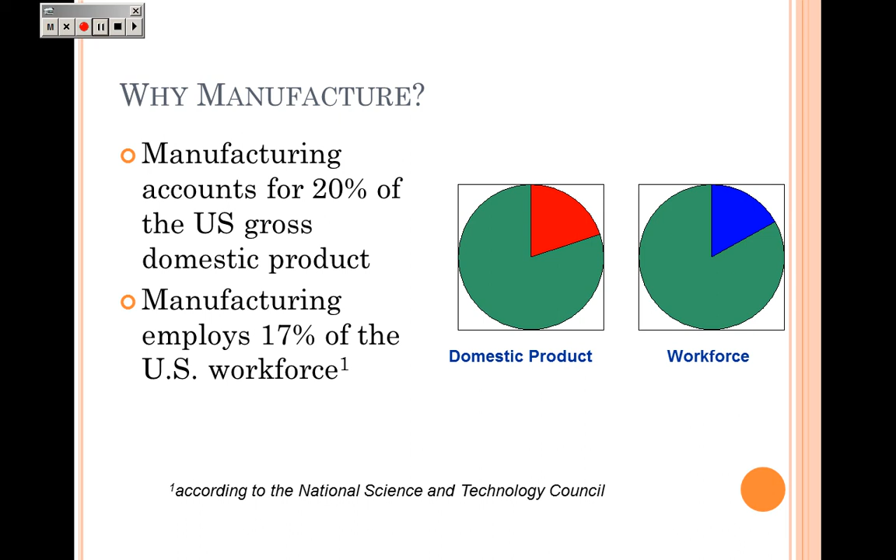Prior to manufacturing, and prior to the 19th century, everything was essentially a handmade good. Things were made by artisans, and all products were handmade. Today we still have artisans and craftspeople like this, but it's more of a hobby or something people do as a specialty or craft to make money. They make beautiful, handmade, high-quality merchandise.

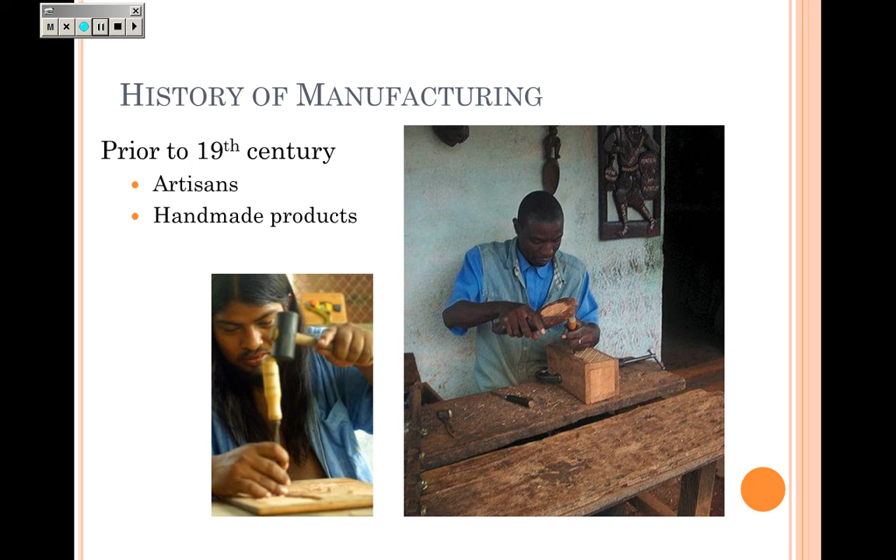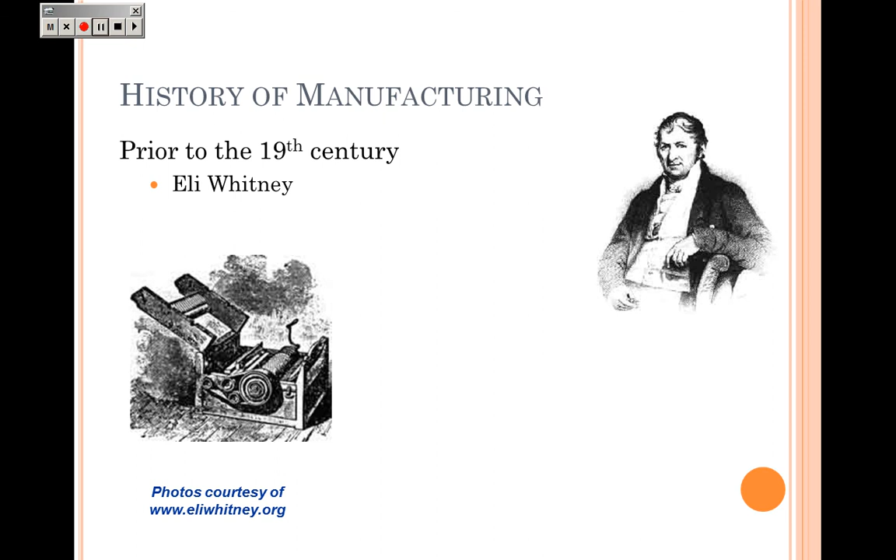Prior to the 19th century, there was a guy named Eli Whitney. You guys probably all know he invented the cotton gin. He didn't have great business skills and went bankrupt because of that, so he left the South, traveled north, and started over. He took a job mass producing muskets, which led to the invention of the first milling machine. He realized he needed to break the production process down into smaller parts that did not require great amounts of skill, so he came up with the first idea of interchangeable parts.

He also had this revolutionary idea, hard as it is to believe it was revolutionary, that workers in the factory should be treated with respect. That idea initially did not catch on in U.S. factories. So while we credit him with the invention of the cotton gin, important in the history of the war between the states, his biggest contribution to manufacturing is the idea of interchangeable parts, along with the work that led to the modern milling machine.

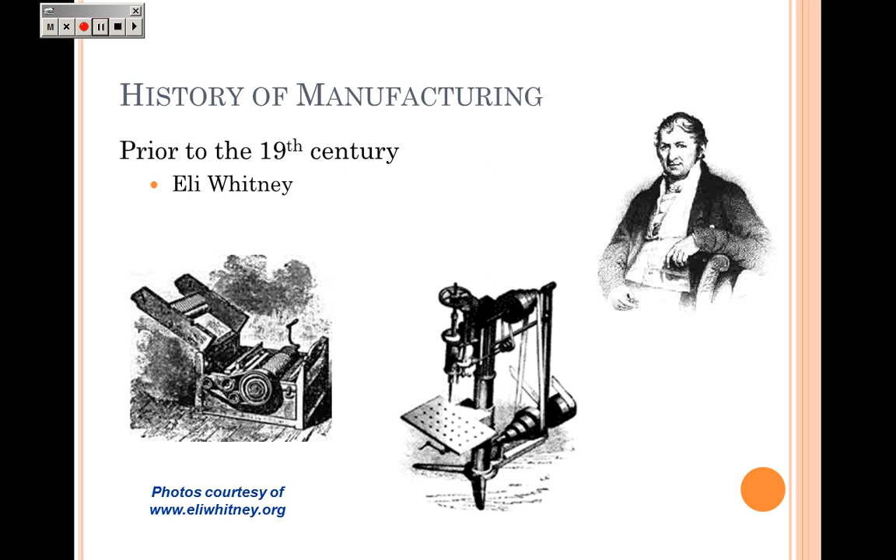Then we have Henry Ford in the early 1900s. He revolutionized manufacturing using the assembly line. He wanted to speed up the manufacturing process by breaking it down into smaller parts so that unskilled laborers could be used — they didn't have to know very much at all. He had a lot of problems with his labor force initially because everything was repetitive and menial, which wasn't the kind of work people were accustomed to, and it caused a low morale problem.

The work was dangerous too. Remember, factories didn't have the safety conditions they do today. Records show they had about 200 severed fingers in the year 1911 alone. So Ford began to improve morale — he doubled the pay in 1914 from $2.25 a day to $5 a day.

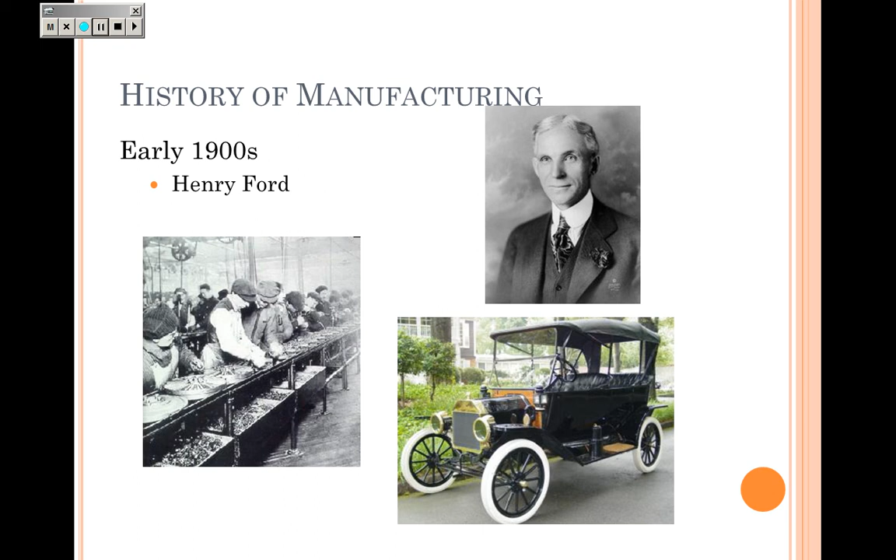Ford Motor Company was also later responsible for the first death by a robot, in the late 1970s, when a worker was hit in the head by a robotic arm.

So changing speeds. In the early 1900s, Kiichiro Toyoda, who we credit with lean manufacturing - Toyota, like the car, because that became Toyota Manufacturing, Toyota Motor Company - they developed what's called just-in-time manufacturing. Just-in-time means the parts get to the assembly line just as they're needed.

For instance, if we're talking about the BMWs made in Spartanburg, the dashes get there from Plastic Omnium just as they are needed. Or maybe those come from the place in Fountain Inn, but the parts get to the line just as needed. Sometimes things are cut so close they even have to put a holding part, a temporary part, in place of things. But when you don't have money tied up in inventory in warehouses, that saves money.

It also saves space. Toyota also introduced the idea of Kaizen, which literally means good change, and it means continuous improvement with employee input. So the Japanese distinguish between Kaizen, which is continuous slow change, from innovation. Innovation is radical change.

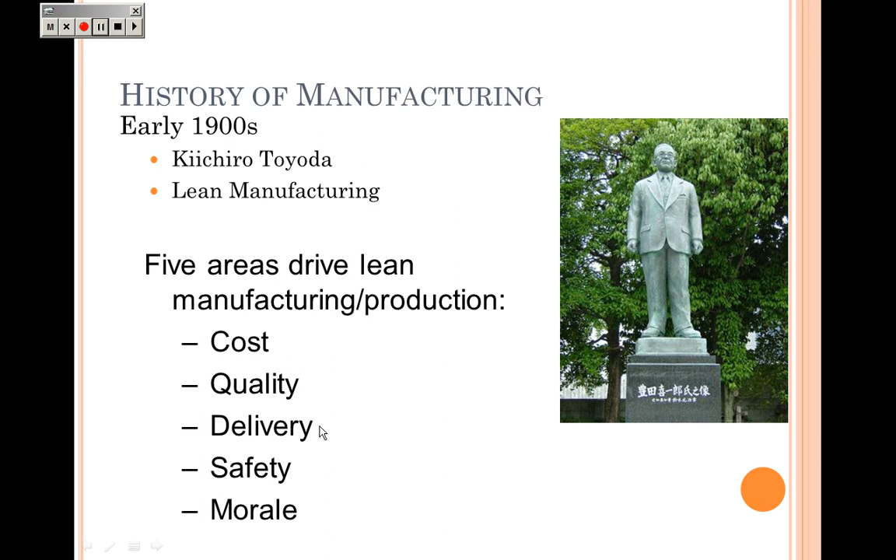So lean manufacturing also became known as the Toyota production system. There's an entire book on that which you can get. The Toyota production system is the systematic elimination of waste, and that phrase was coined in the early 1990s. People still use lean manufacturing today. But the systematic elimination of waste centers around 5 areas: cost, quality, delivery, safety, and morale.

So, a history of manufacturing. In the mid-1900s, the Webb Company created the first electronically coordinated conveyor system. You can see some conveyor systems here, different kinds - overhead, underneath, very typical to what you would expect to see. These folks introduced conveyor systems to Henry Ford, and they continue to make conveyor systems today.

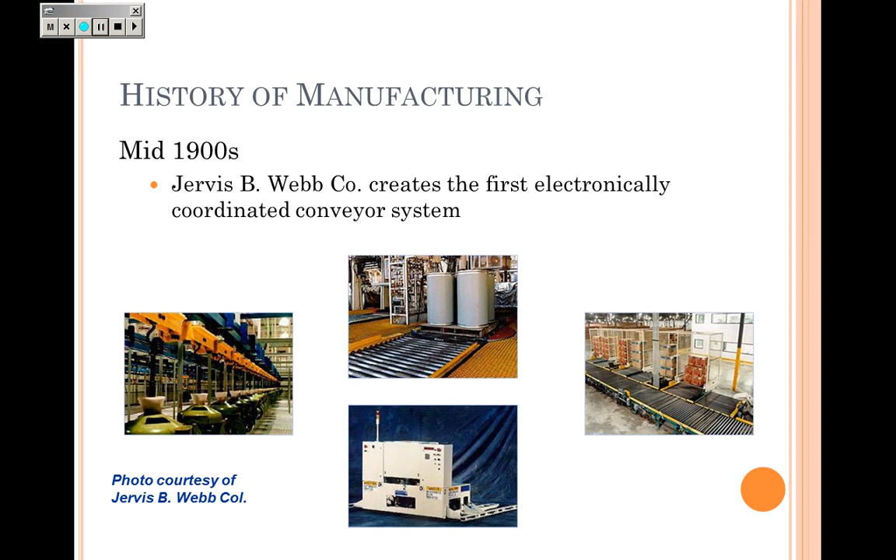So manufacturing today centers around some other automated pieces. The automated storage and retrieval system moves material horizontally and vertically between storage compartments and transfer stations. It can bring it to the process line, or bring it out to a control panel where an operator dials it in, and it goes and retrieves the part and brings it out automatically.

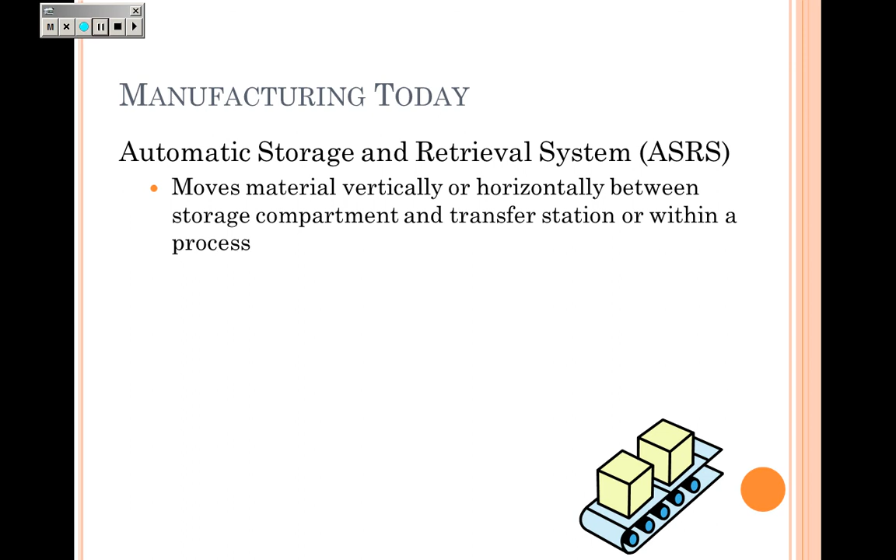The very first place I worked in manufacturing actually had 2 self-guided vehicles. Ours were used to deliver mail and hot jobs around the plant, and we called them Tweedledee and Tweedledum. However, Tweedledum was dumber and sometimes had more accidents, so we had to be careful with him.

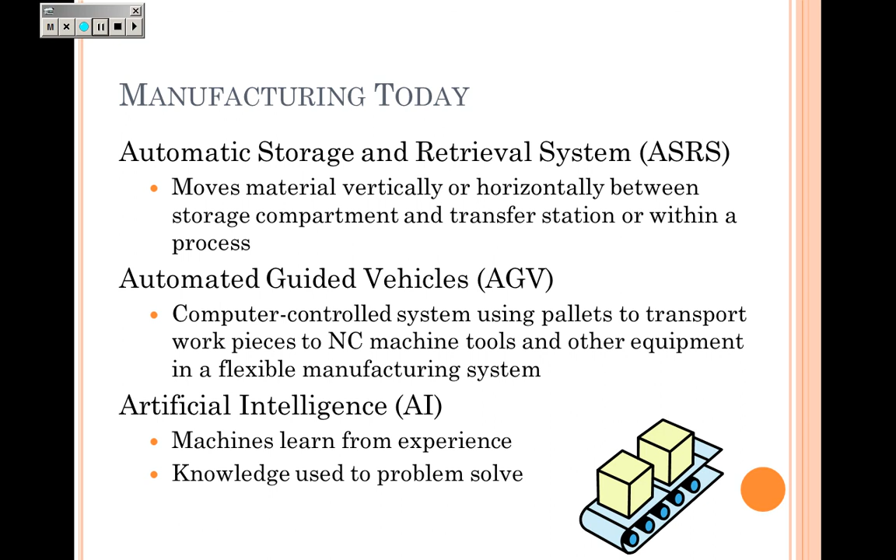Okay, then the other one is artificial intelligence. That's where machines learn from experience, from what they've done previously. You might think about this like if you've ever made a change in Word or PowerPoint, changed how a bullet was formatted, and the next time it automatically adapted. That's kind of a type of artificial intelligence - it learned from the experience, that software did. So in this case, the software reads what you're doing, learns from experience, and changes what the hardware is doing there.

Continuing on, Computer Integrated Manufacturing is what CIM stands for. It is a factory or company-wide philosophy for planning, integration, and implementation of automation. It does not eliminate workers, but it does change the job workers have, and it also changes the skill level to be higher, so it actually increases the pay.

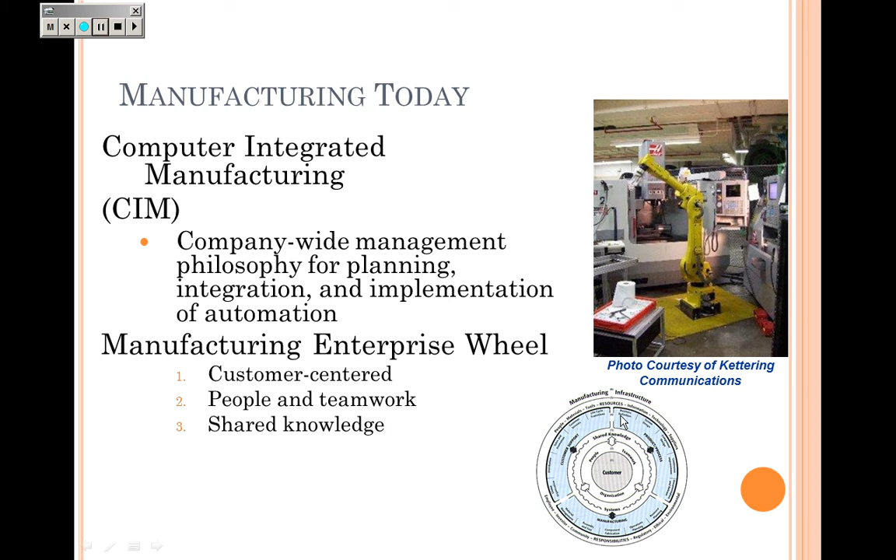Then if we look at this manufacturing enterprise wheel, this shows that the customer is the center of all manufacturing activities - that's why we engage in the activities. People and teamwork are an important part of it. It's about shared knowledge, as you can see in this inner circle. And then the key processes are an important part, along with what the resources and responsibilities are, and the infrastructure.

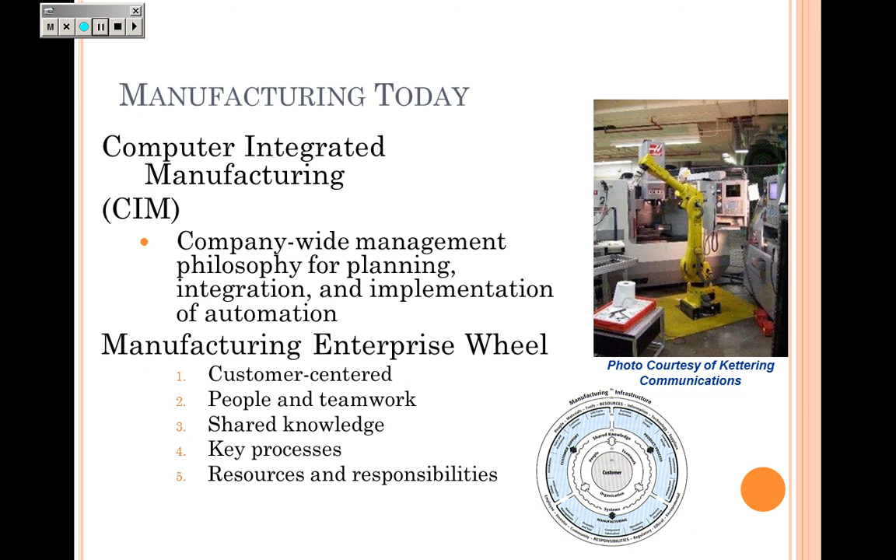Let's talk about Kaizen a little bit. That is the Japanese word for improvement, and it's based on continuous improvement by everyone.

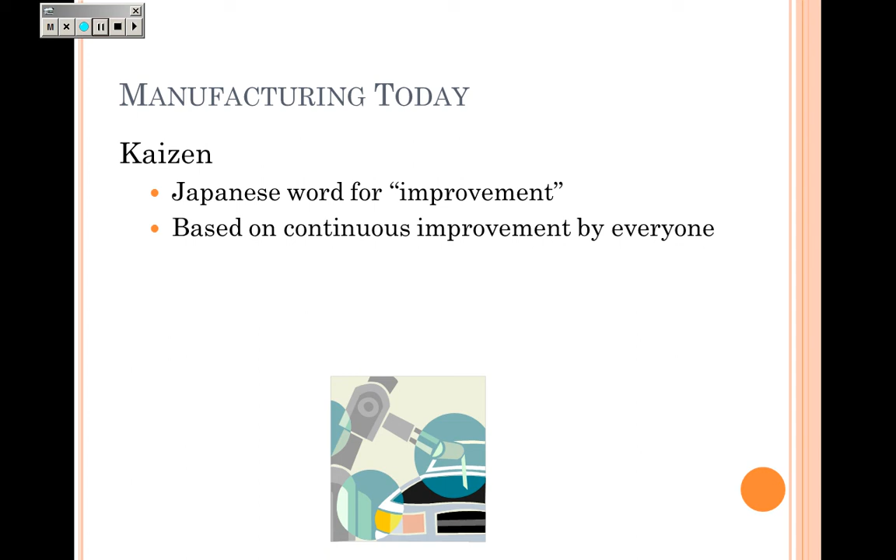We also have something called a flexible manufacturing system. This is a work center that can be adjusted. Conveyors could be moved, the robot could be moved, the end effector could be changed on the robot to make it do different things. You can adapt the system to a changing need, and it's efficient. It can increase productivity by as much as 50%.

Here I'm showing kind of a robotic arm in this clip art. It's spot welding or placing something on an automobile line. But that robot will do that job repetitively and not complain and not get bored.

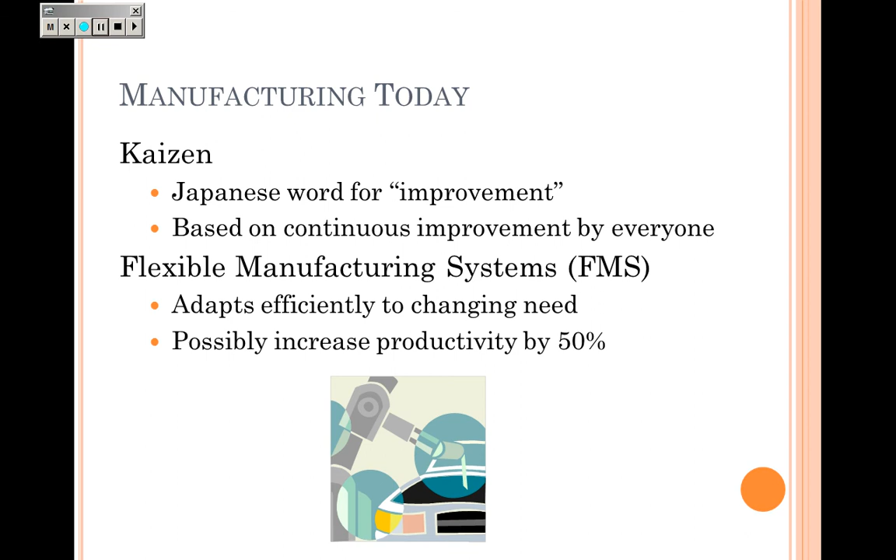Just in time, see the clock? JIT, the objective here is to eliminate waste. You can produce mixed products; it doesn't mean you necessarily only make the one thing just in time. In just-in-time facilities, workers are going to be cross-trained, but they are going to be more valuable because of that.

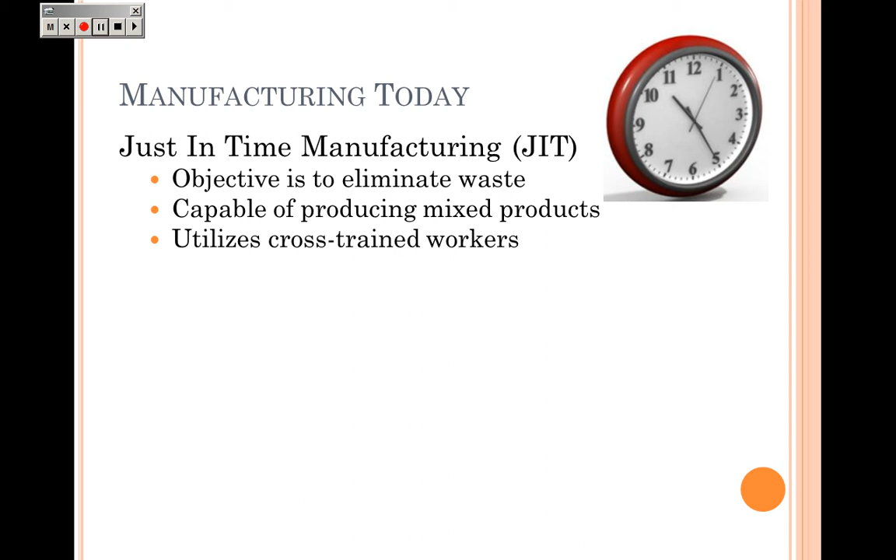The Toyota Production System, TPS, that's what we call lean manufacturing. That began in the 1980s, and then in the 90s we began to call it lean. In this system, everything is highly coordinated. You want all the activities involved in production to happen at a specified time. You want to minimize storage, so you don't want there to be a cost of goods in storage. The combination of just-in-time and the Toyota Production System, lean manufacturing, started earlier, but they are still very popular today, over 20 years later.

The Toyota Production System has been widely used in automotive. It competes with mass production. It employs a lean production strategy. There are not going to be a lot of people standing around doing nothing at work.

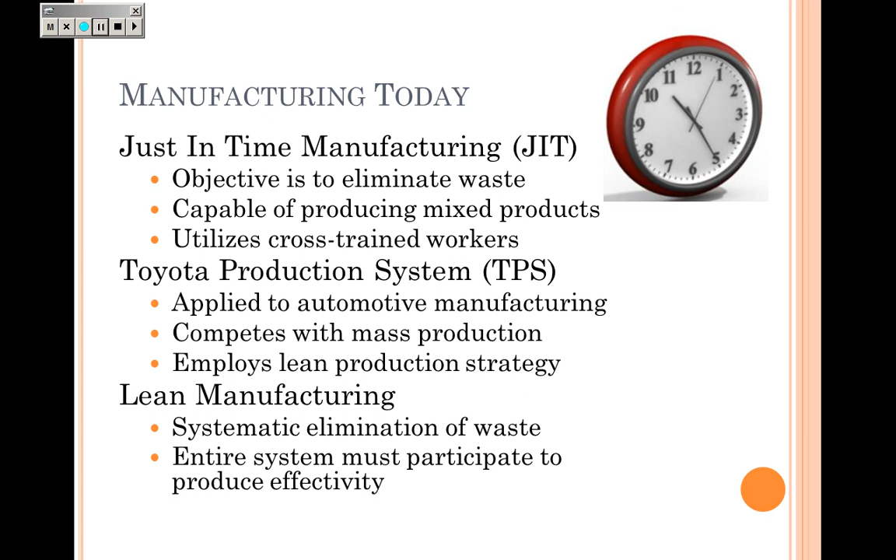Lean manufacturing is the systematic elimination of waste. For that to work, the entire system, all the people, from the lowest operator to the plant manager, have to participate. This is the lean manufacturing video, and I'll ask you to go offline and watch that.

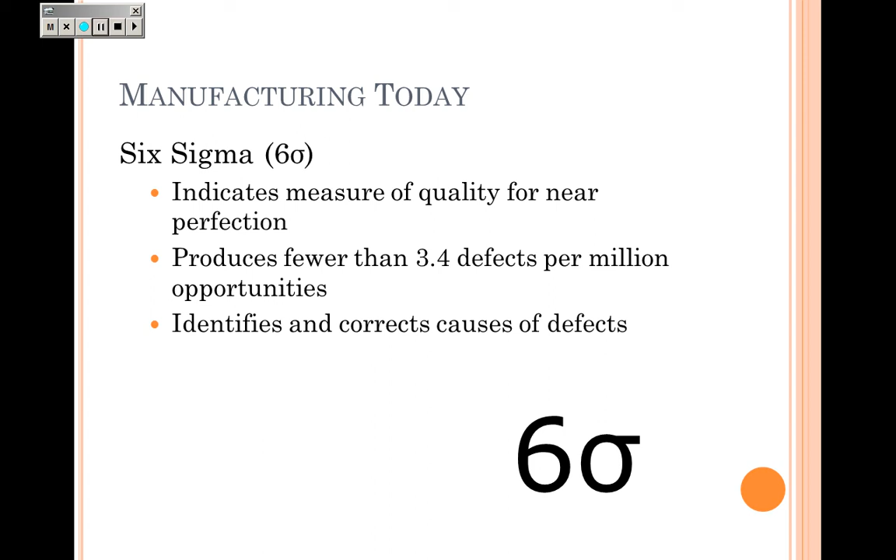Six Sigma, that is a quality measure that is statistically based, and it means you are aiming for near perfection. It produces fewer than 3.4 defects per million, and it uses statistical tools to minimize defects and maximize production. The Six Sigma process also identifies and corrects the causes of defects. It utilizes the 5 whys to uncover the root cause.

This is a flexible manufacturing cell. This is a flexible conveyor system. These are storage racks. There are some milling machines there, and robots.

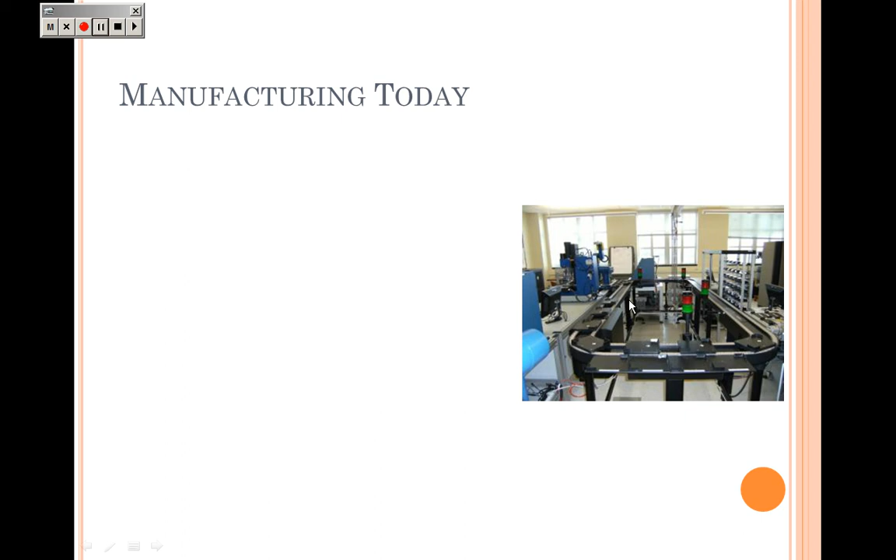Rapid prototyping, that's a prototype made directly from a computer model. You don't have to take it to the machine shop, you don't have to get a machinist to make an initial prototype for you. There are a lot of different technologies, some are additive, some are subtractive. The most popular are additive three-dimensional printers.

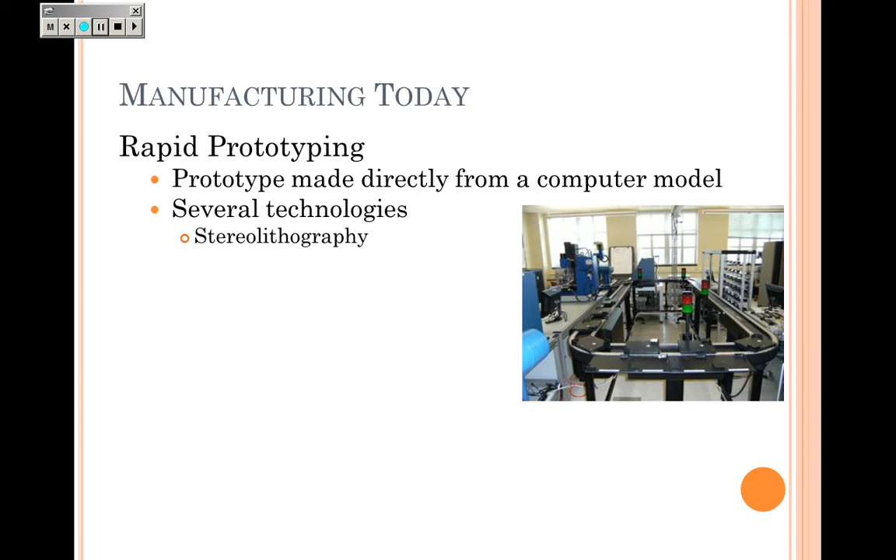There's stereolithography, there's 3D printing, there's selective laser sintering, there's fused deposition modeling. So all these are methods. The most popular these days is really the three-dimensional printing. We have one of those in the back of the lab, you'll be able to see that.

Work cell. Like I said, this is a work cell. It's the manufacturing resources arranged in a group. You've got milling machines, you've got a lathe there maybe. There's a robot somewhere putting pieces on and off the conveyor system. There's a storage area. And this can be reconfigured if you need to do something different.

Work envelope, that is the range of motion of a robot or a machine. If you place the robot over here in the corner of this room, its work envelope is not going to allow you to reach the conveyor.

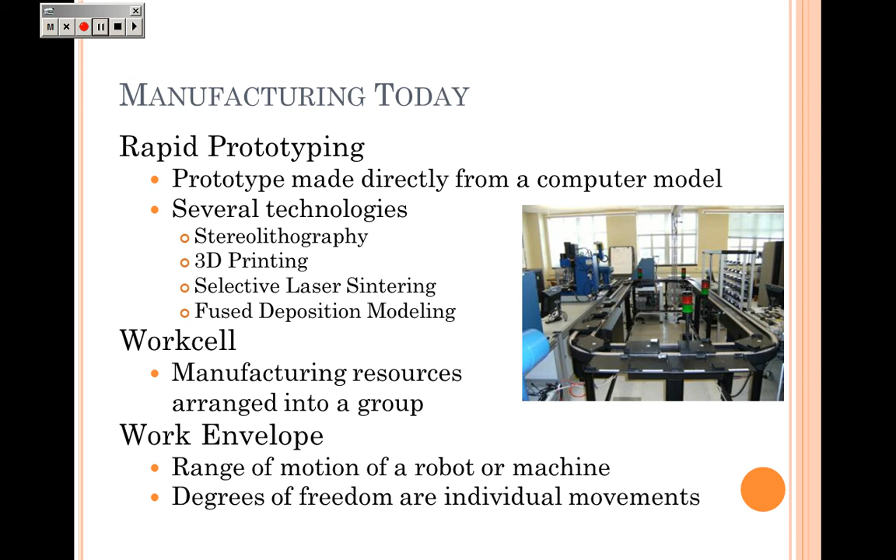Degrees of freedom. Every axis that a robot can move on gives you a degree of freedom for individual movements. The more degrees of freedom a robot has, the more accurately it can do a job.